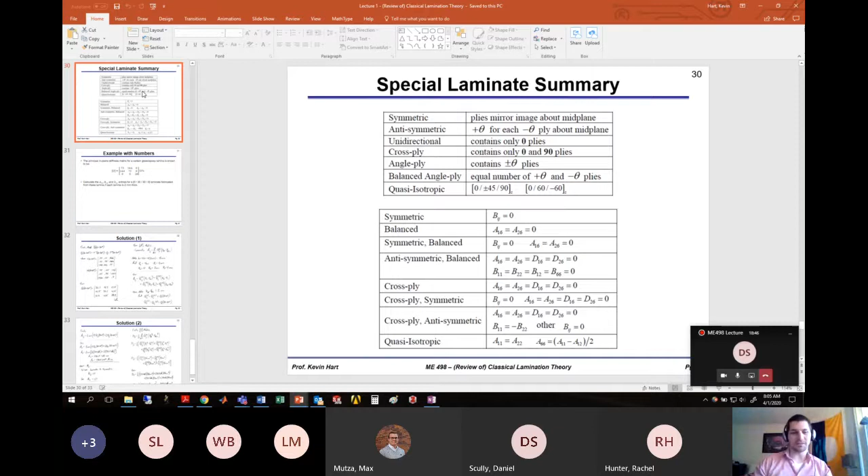So these are the laminate stiffness matrices. We talked about and showed one example with a symmetric laminate and how we might see that calculation proceed. If there are some symmetric characters or special characters of the laminate, the calculation of these A, B, and D matrices proceeds a little bit easier.

Now, the last thing I want to do is quickly go through this example. We already went through an example without numbers, but I want to go through one with numbers here just so we can bring it home. This is going to be similar to homework problem number 1 on homework number 2.

So let's say you're given the principal in-plane stiffness matrix, this matrix Q, for a certain glass epoxy lamina, and you calculate it to be something like this. Remember you could calculate this from fiber volume fraction and material properties of a lamina you created. You can calculate E1, E2, nu 1,2, and so on, and those feed into the S matrix, which you can then invert to get this Q matrix. That's something you did on homework 1, so hopefully you're comfortable with it now.

Given these values in our in-plane stiffness matrix Q, we want to calculate A11, B11, and D11 entries for a laminate stack that's 0, 30, 30, 0, assuming each lamina in the stack is 2 millimeters thick.

I'll come over to the writing pad for just a second, and then we'll throw it back over to the PowerPoint slides to run through it quickly. Here's the example, and I'll switch over here in just a second.

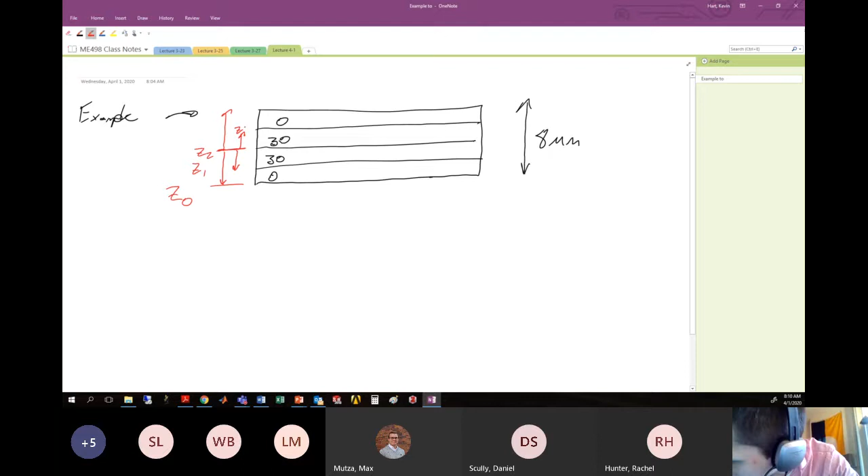And these are our general definitions for these Z values. Remember, I'll pop over here to PowerPoint for just a second. Remember, we define our midplane as sort of the location of z equals 0. And so we would say here to the bottom, this is z0. And here this is what would be z1. Here's z2. Here is z3 and z4. So just defining from the center of the laminate stack to either the top and bottom of the various lamina.

I know it feels like I'm beating this ABD thing to death, but it really is the foundation for pretty much what we're doing the rest of the theoretical portion of this class.

All right, so here we define our Z values, and now we're just ready to plug in. So the AIJ, since we have 4 components, becomes Q-bar IJ of the first layer multiplied by thickness of the first layer plus Q-bar IJ second layer times thickness of the second layer, so on and so forth. And we'll note here that the thickness of each layer, Zk minus Zk minus 1, is just 2 millimeters. So that's pretty obvious to see.

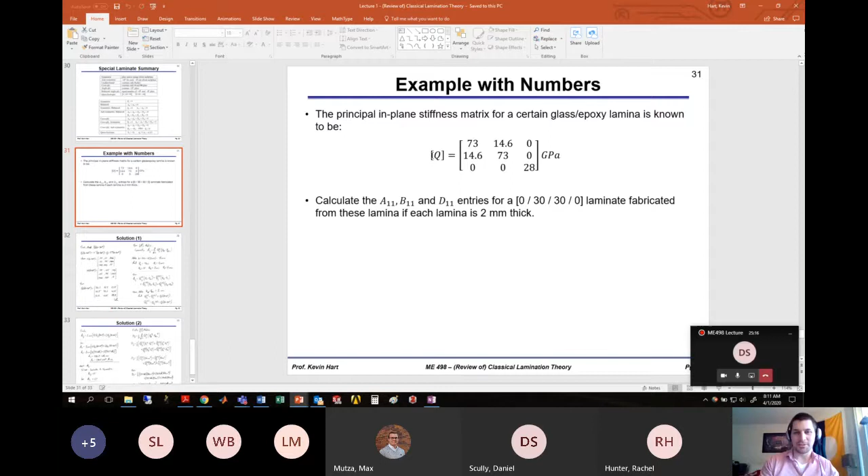And our QIJ for layer 1 and layer 4, so this is the stiffness matrix of layer 1, stiffness matrix of layer 4, is the stiffness matrix of the 0 degree orientation, which was given to us in the problem as just this particular guy here. So we know that's given to us in the principal material directions, and that is for theta equals 0. Now, layers 2 and 3, we're going to use the stiffness matrix for when theta is 30 degrees, which is this guy here that we calculated over here.

So proceeding on, you're going to end up with something that looks like this, pulling the 2 millimeters out for each one of the individual layers. And then we have 2 contributions from the stiffness layer of the 0 direction, 2 contributions from the stiffness in the 30 degree orientation. And we move through with our calculations, plugging in the numbers here.

So if we're looking at the 1-1 entry, we're going to take the 1-1 entry of Q for theta equals 0 degrees, and we see up here that that is 73 GPa. And then here, the 1-1 entry for the theta equals 30 degrees matrix, we see from our previous calculation that that is 72.1. And that gets us a value for the A11 matrix, 580.4 GPa millimeters, or if you convert to Pascal meters, which is common, it's 580.4 times 10 to the 6th for the A11 entry.

Okay, so this is kind of going through a full-blown application or calculation with numbers. Bij, all Bij are 0, this laminate is symmetric, so that's easy. So B11 here is 0, and that's because we know the special character of this particular laminate.

All right, lastly, our D matrix, here's the full calculation. Again, the same idea holds. Don't forget your 1/3, contributions of the stiffness from each of the individual layers, multiplied by these locations of the laminates, all to the 3rd power. So again, we go through, we know all these individual values, including what would be the QIJ entries now for the 0 degree orientation, 30 degree orientation lamina. Plug all the numbers in appropriately with cubed values appropriately, and you'll end up with a D11 of 3110 Pascal meters cubed here. I want to give this example with numbers because it's similar to what you got going on for the first homework problem in homework number 2.

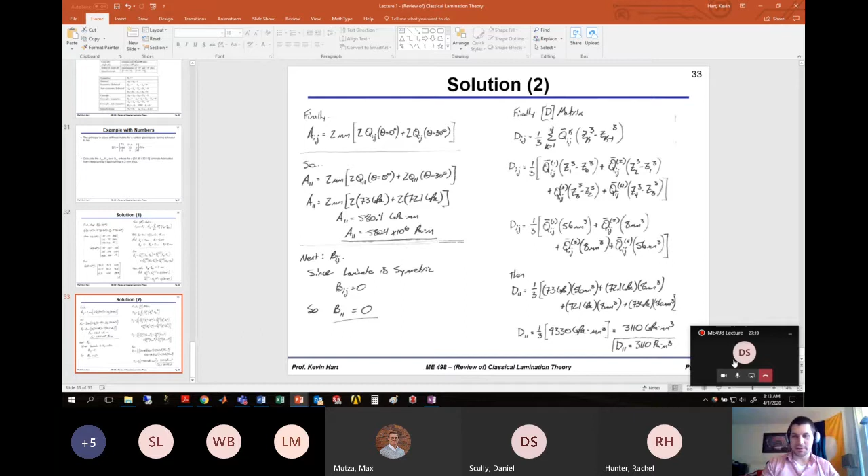All right, there we go. How we doing? We awake? Got the coffee going? I got my Perrier. I'm fancy.

Why drink boring regular water when you could drink sparkly water.

Okay, so with that said, I'm going to move onto the next set of notes. That is, we're going to introduce the idea of laminate engineering properties. The next set of notes is laminate engineering properties.

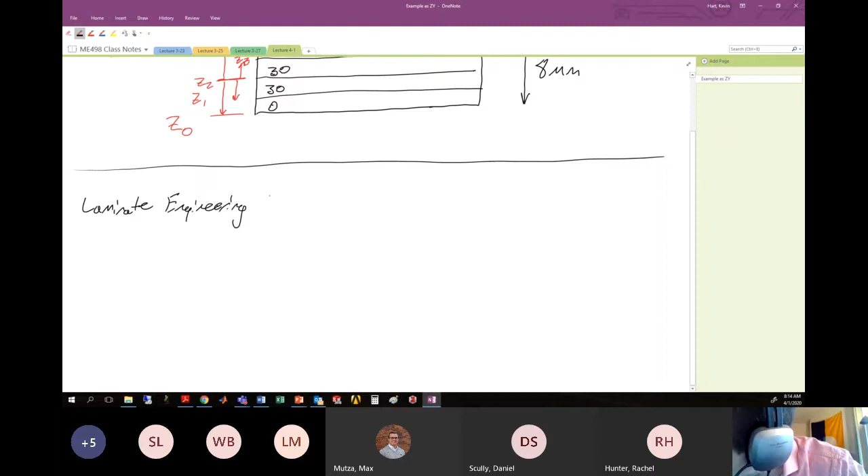Now, we've calculated or gone through all these steps to calculate things like the A matrix, the B matrix, and the D matrix. Those matrices define the constants that make up the relationship between applied loads and the strains and curvatures that develop. But it's not really intuitive to discuss material properties in terms of A, B, and D matrices. If someone fabricates a laminate, you're not going to walk up to them and say, 'Hey man, what's the A11 value for that guy?' It doesn't really make a whole lot of sense.

So instead of talking about properties of the laminate as A11, B26, whatever, you probably want to talk about what is the stiffness or the elastic modulus of this material if I load it in a certain direction. So given a laminate, we would like to describe the way that the laminate behaves using typical engineering properties. We'd like to describe its behavior with typical engineering properties.

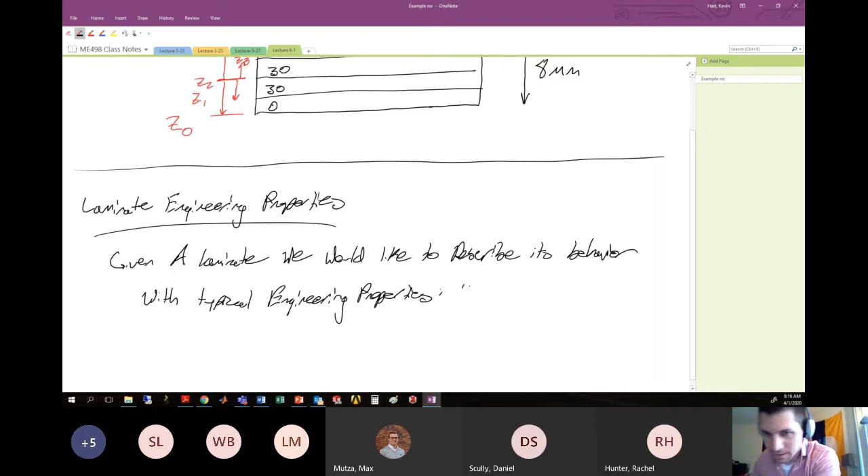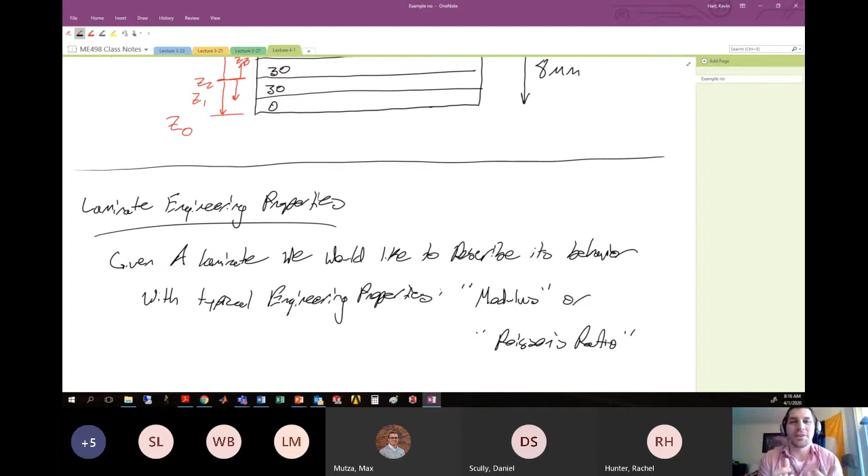So think about things like the modulus or Poisson's ratio. Modulus should come to mind, or Poisson's ratio should come to mind. These typical physical, physically interpretive concepts - modulus, Poisson's ratio.

So let's take a step back in our Wayback Machine, back to what you talked about in ME3005. What would happen if we wanted to describe these things for an isotropic material?

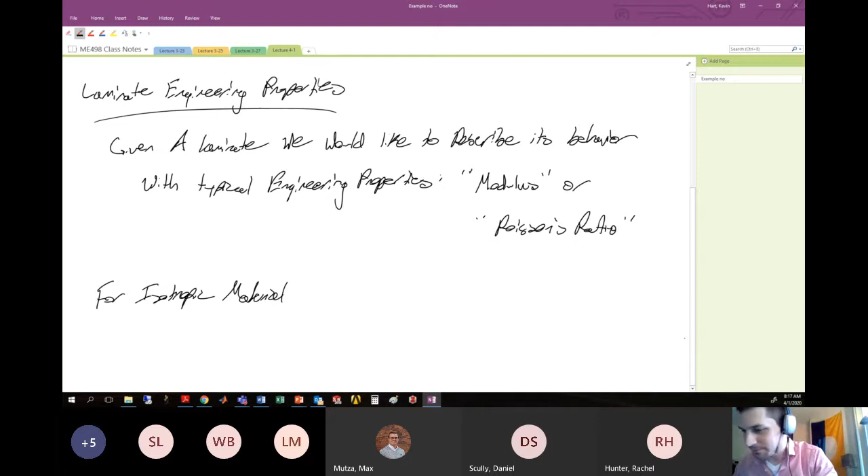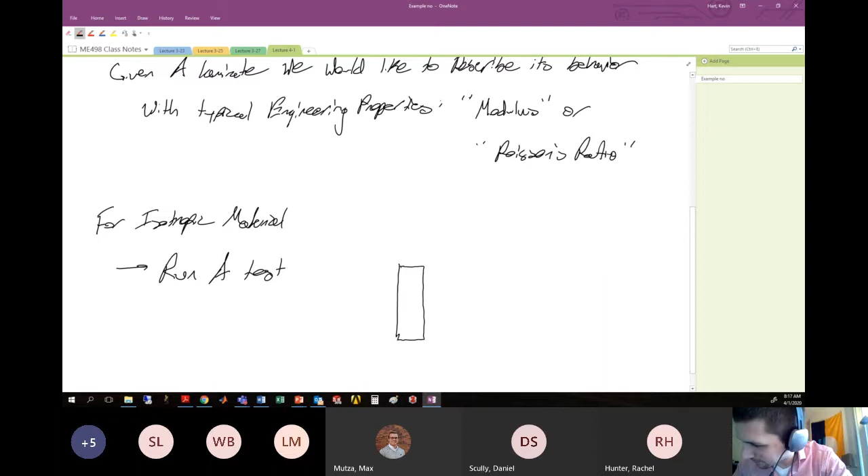For isotropic material, that's pretty straightforward. You would run a test, and that test might look something like this, where you have some coupon - let's make it rectangular for now. To this, you're going to load it here with some load P, load it here with some load P. What's going to happen? Well, that thing's going to elongate and you're going to create stress.

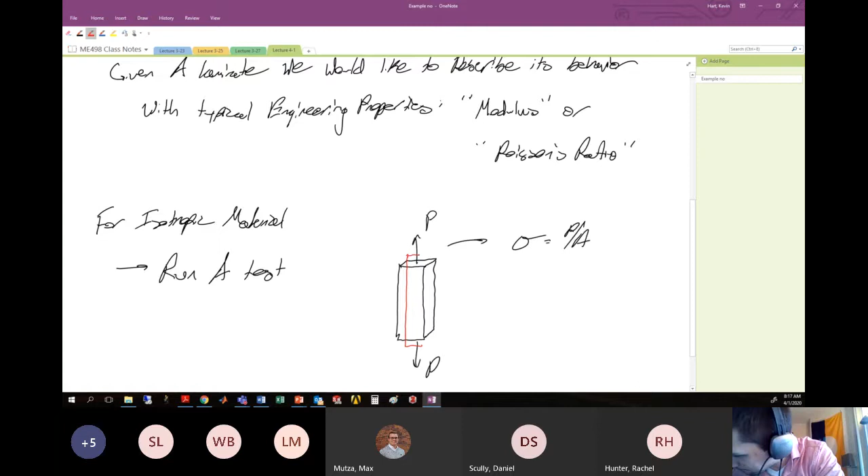This will give you a stress, which is the load over the area. And if this thing elongates during the test, which it might, this is delta plus L, the displacement plus the original length. Then you're going to get a strain that is something like delta over L. Then your elastic modulus E is simply the stress divided by the strain. This gives you an engineering constant, the elastic modulus, described by some physical things that you did - you applied some stress, there was some strain that resulted, you measured those things, and away you went. So for isotropic materials, that's pretty straightforward, that's pretty easy.

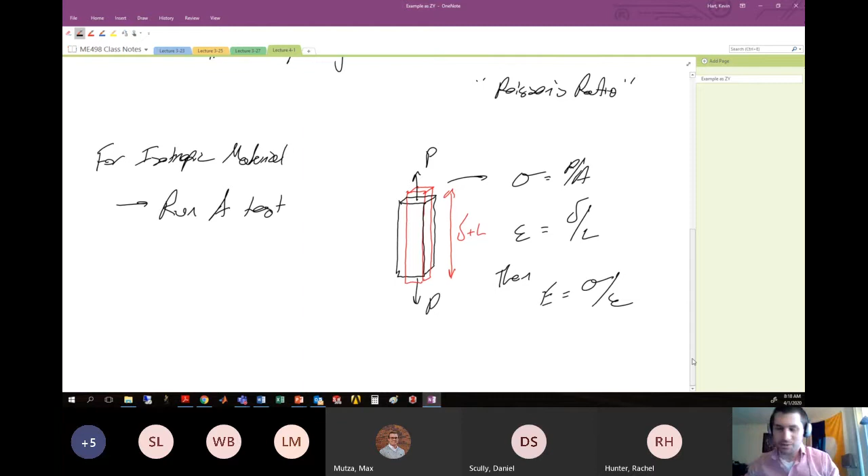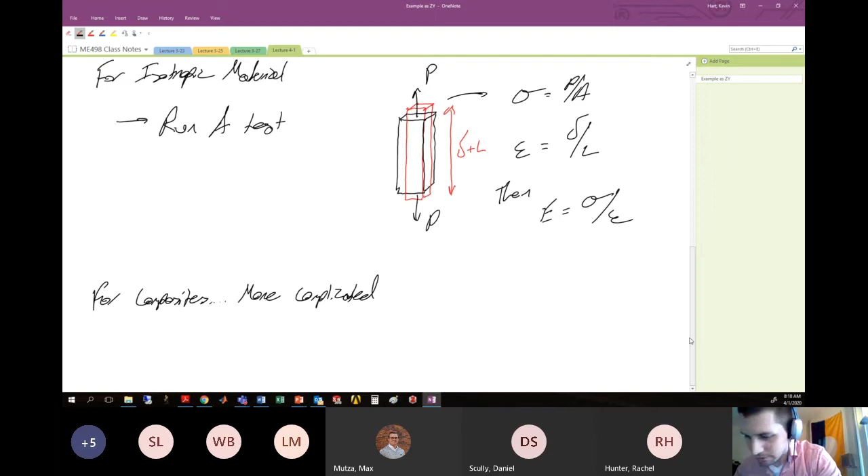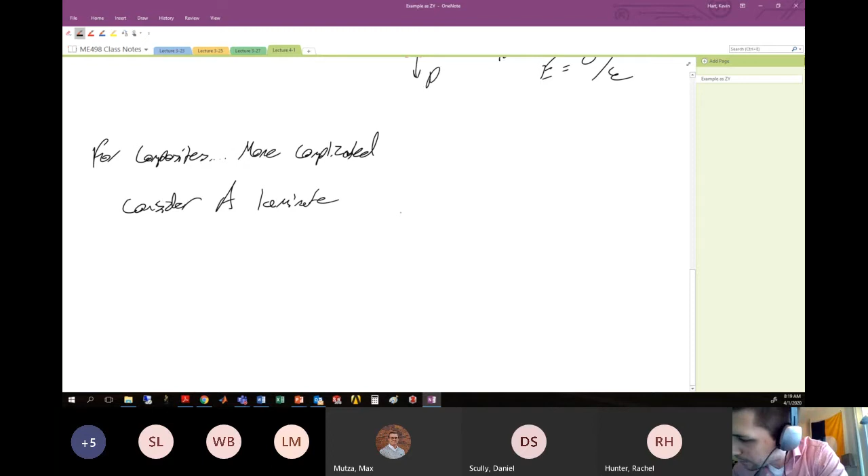But for composites, it's more complicated. If you had a laminate material, let's consider a laminate where maybe you have a rectangular coupon that looks like this, but it's a laminated material, so you have multiple layers of that particular material in this laminated fashion. Now if we pull on this guy in this direction with a force per unit length, which might be something like Nx - this is force per unit length.

Then the response is complicated. The stress in X is not just Nx over the cross-sectional area. We know it's more complicated than that because the stress distribution is different in each layer. It's not necessarily that value, since stress varies in each layer.

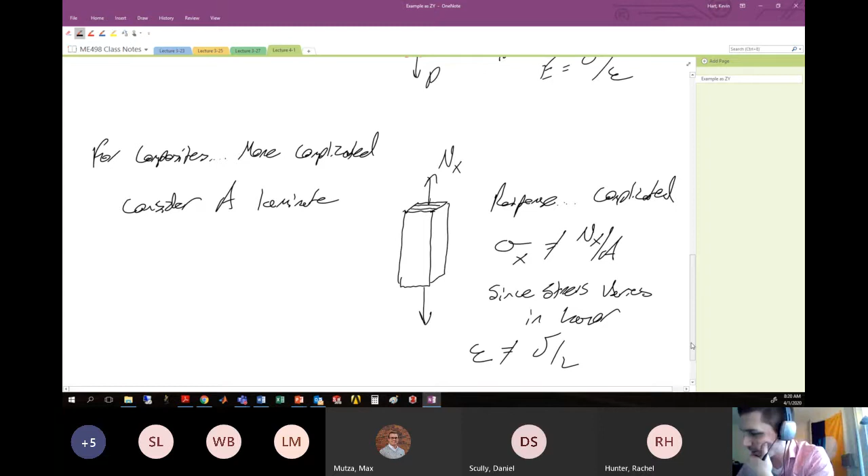And the strain is not just whatever your displacement is over the original length. We know that when we pull on these laminates, there can be shear strain that develops, there can be curvatures that develop, there can be all sorts of things that develop. So you can develop shear strains and curvatures from axial loading. So it's much more complicated.

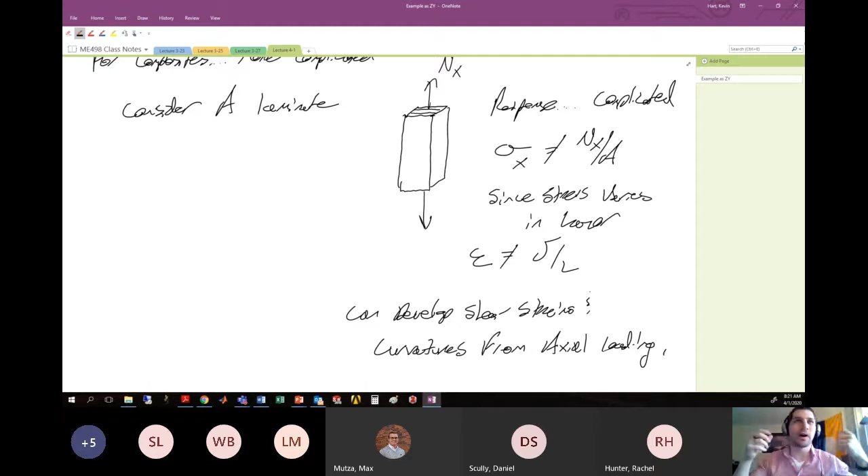So we have to talk about what strategy we might employ to discuss something like, what is the stiffness of this guy in this particular direction, given a certain assumption about loading and cross-sectional area and all this sort of stuff. So we need a different strategy.

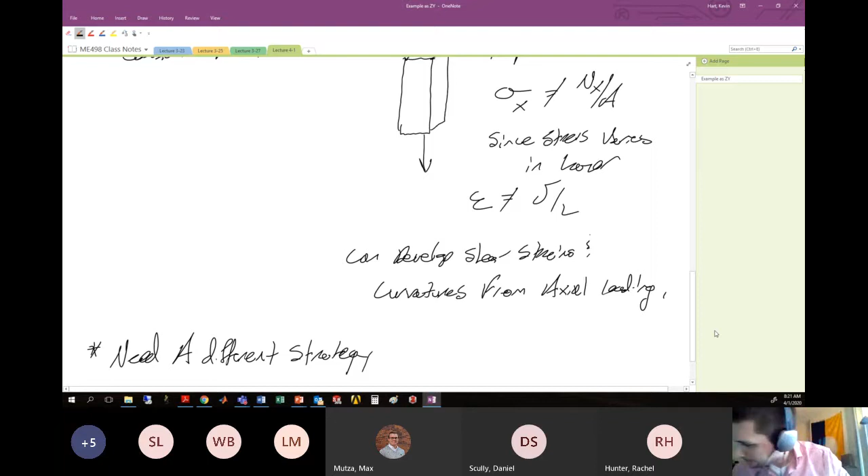All right, so let's talk about what that strategy might look like for us. Let's work our way through the math to get to our ultimate final location. So how might we do this?

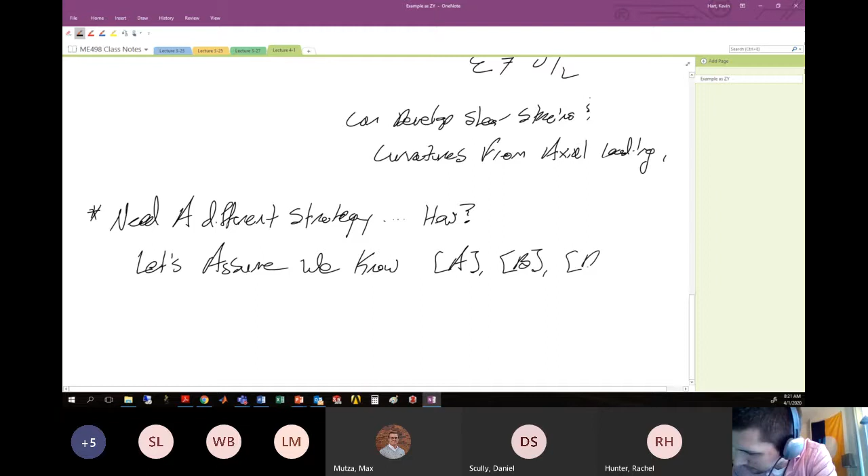Okay, well let's assume we know our ABD matrices. So we know the laminate stacking sequence, and we know the stiffnesses of each of the individual lamina, so we could construct the A, B, and D matrices. Let's assume we know that.

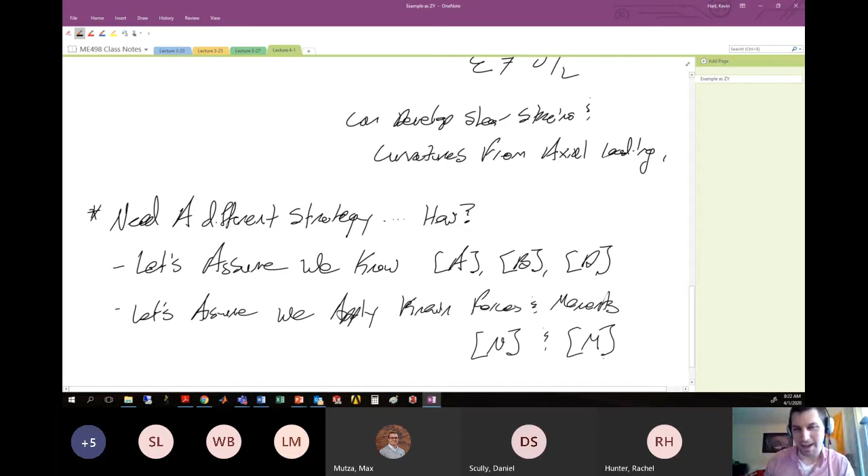And let's assume we apply some known forces and moments, which in this class we call N and M, where these are vectors of nx, ny, and ns, and m is mx, my, and ms. Remember we've talked about these.

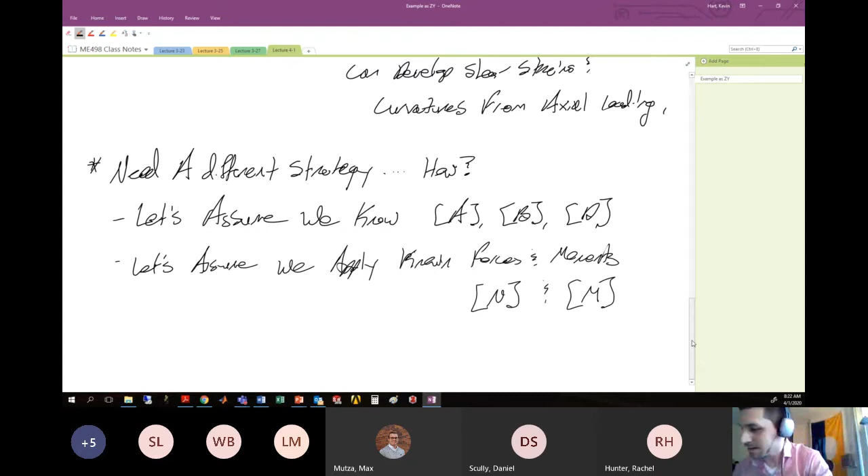Then we can discuss things like the relationship between loads and strains. So the following strategy might occur. Here's our strategy. Step number one would be to determine what the strains and curvatures of the laminate that result would be.

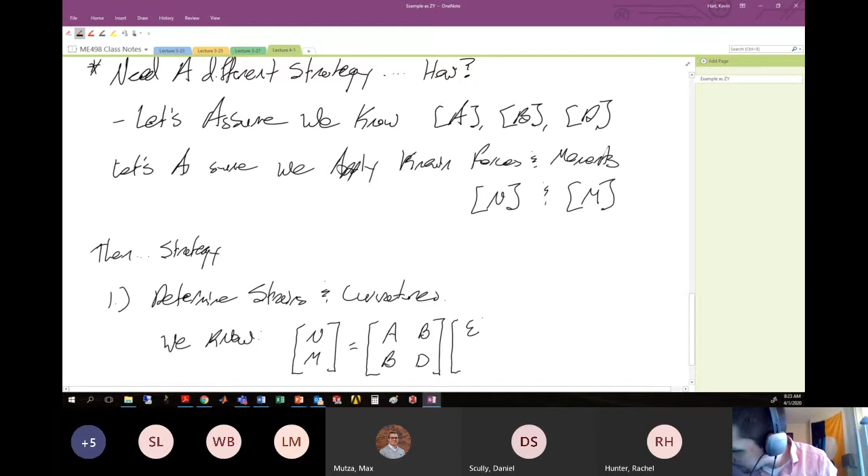From previous lecture, we know that the relationship between the forces and moments we apply, N and M, are related to the strains and curvatures that develop through the stiffness matrix A, B, B, D, multiplied by the midplane strains epsilon 0 and the curvatures kappa. All right, so we know this.

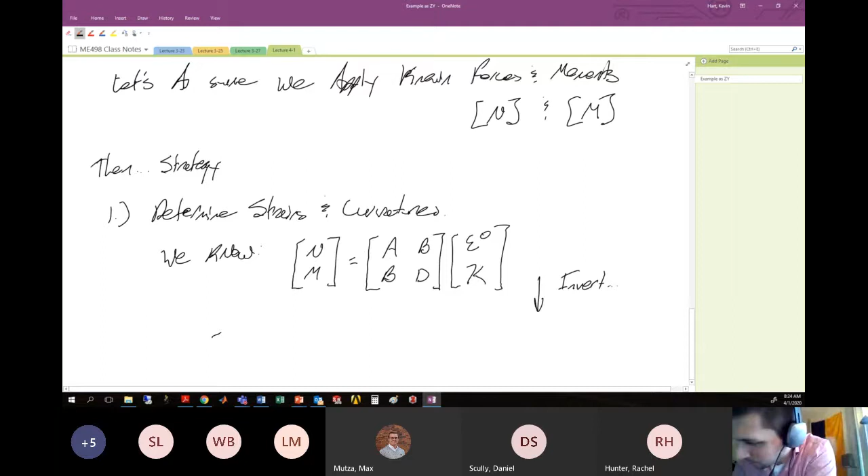If we actually want to determine what strains and curvatures might develop given applied loads, then we simply invert this to determine what the strains would be. So we could invert this to get epsilon 0 and kappa equal to this ABBD matrix inverted, multiplied by the loads and moments we may apply. That's step number one, determining the strains and curvatures that might develop.

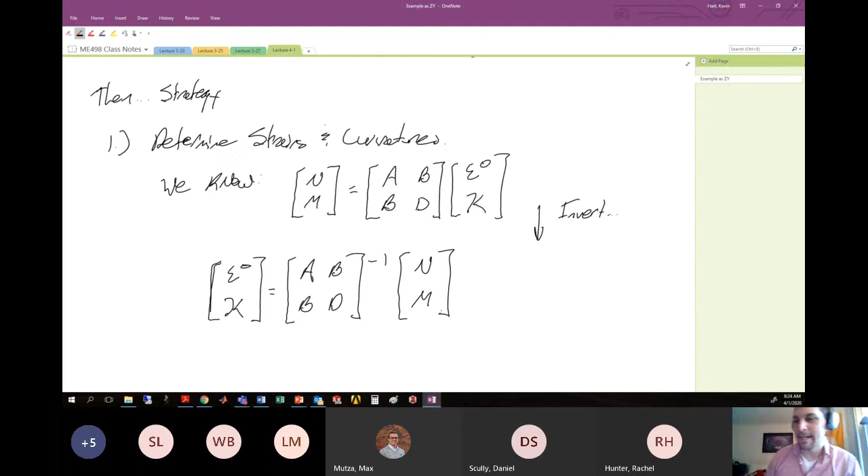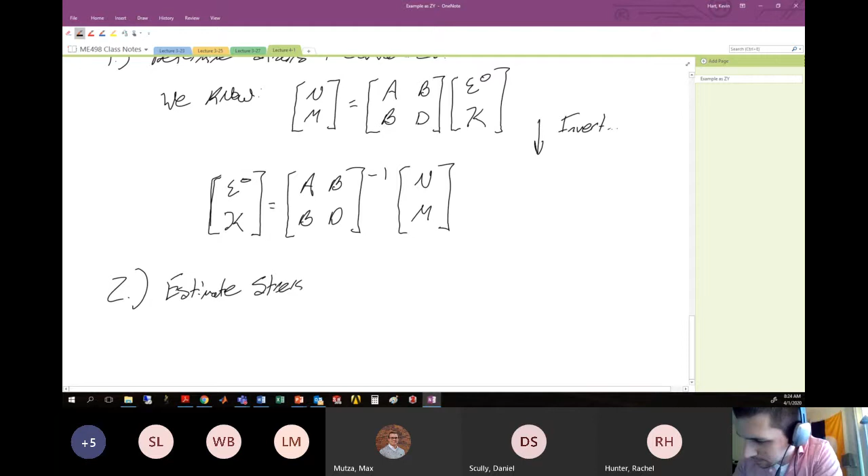All right, so step number two is to come up with some expression for the stress, to estimate stress applied by averaging N and M in some way. If we could come up with some average stress that we might be applying, then we might be able to relate the strain we determine using this inverted ABBD matrix to the average stress we apply, to determine things like the modulus, which is a relationship between stress and strain.

So we will employ the mean value theorem. It's so mean. To give sort of estimated stresses.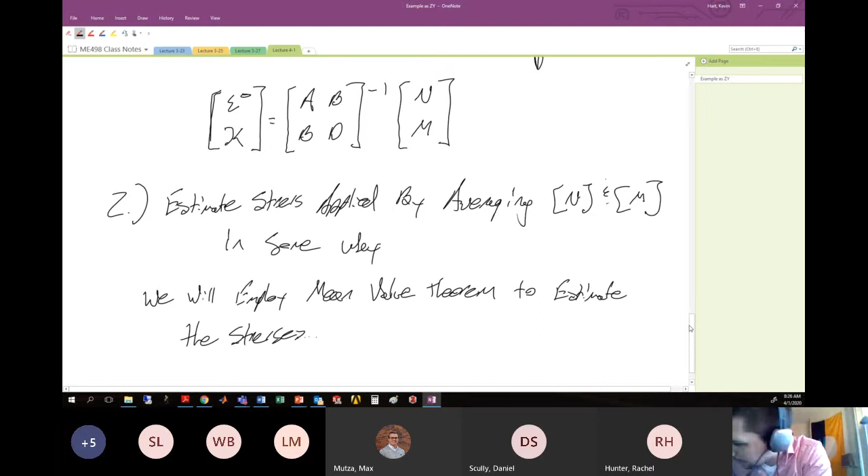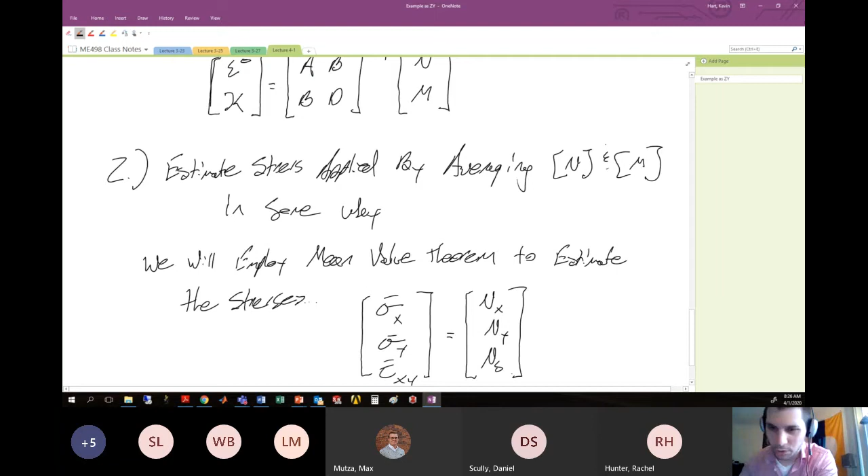We will show that we can do that by writing something like the mean stress in X, which we'll call sigma X bar, the mean stress in Y, and the mean shear stress, which we'll call tau XY bar, or sigma S bar, is equal to the applied loads Nx, Ny, and Ns, all normalized by the thickness of the laminate, 1 over H. So these would be average stresses, and these are applied loads normalized by thickness, where H is the full thickness of the laminate.

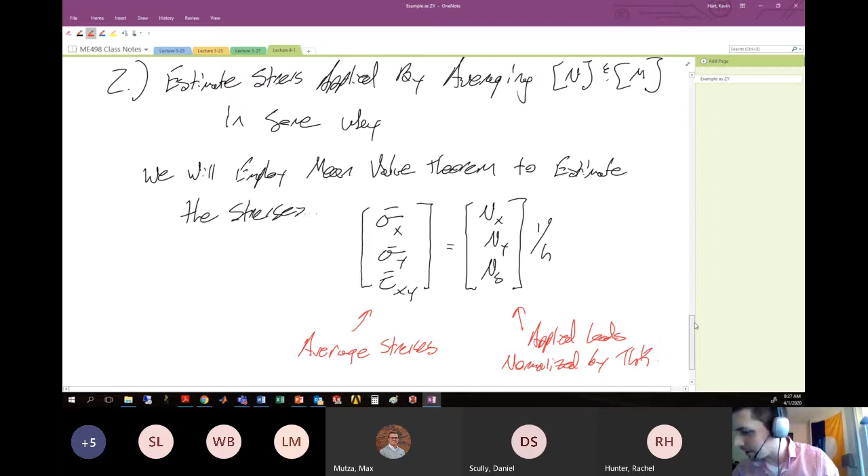And we will show how this comes to be. So if we then have some average stress that we're applying, and we can estimate the strains and curvatures, then lastly, we'll say that we can approximate

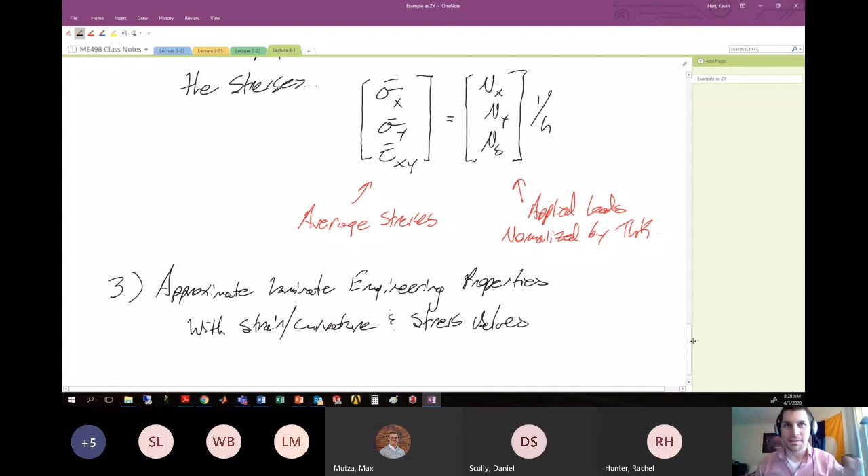the laminate engineering properties with these strain, curvature, and stress values, to come up with what we might say is an approximate laminate stiffness or an approximate laminate Poisson's ratio.

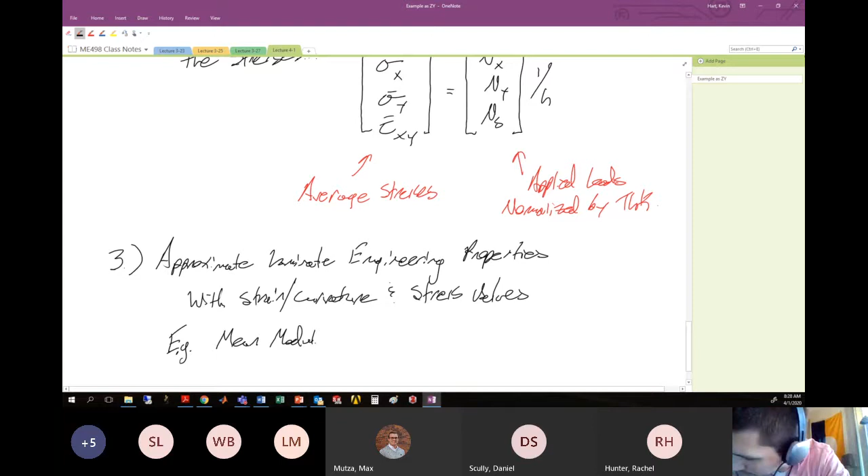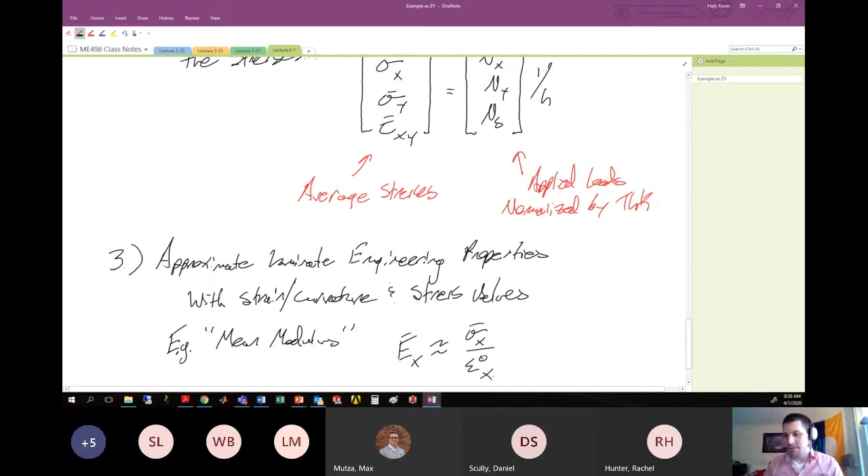So, e.g., a mean modulus, which might be something like E bar X, approximately equal to this mean stress calculated from the mean value theorem divided by the strains which might develop in the X direction. Okay, so that's the general strategy.

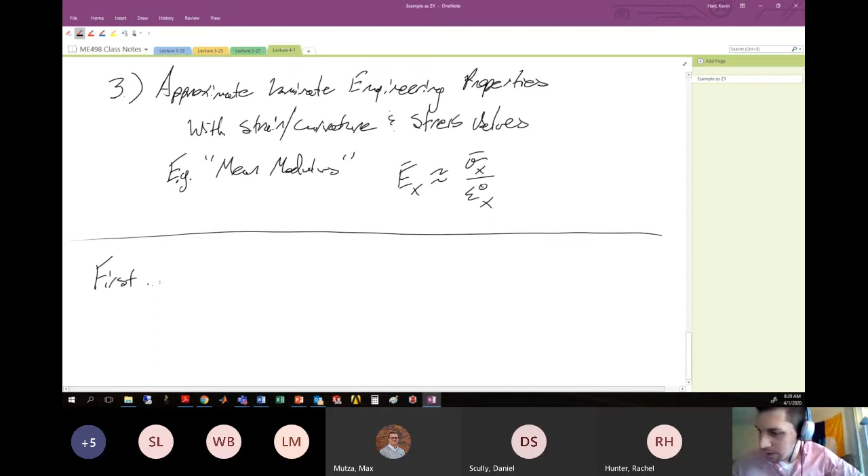So let's go ahead and work our way through this. Step number one would be coming up with these strains and curvatures from applied loads and the stiffness matrix. First, we're going to talk about the laminate compliance matrix. This laminate compliance matrix is just the inversion of the laminate stiffness matrix.

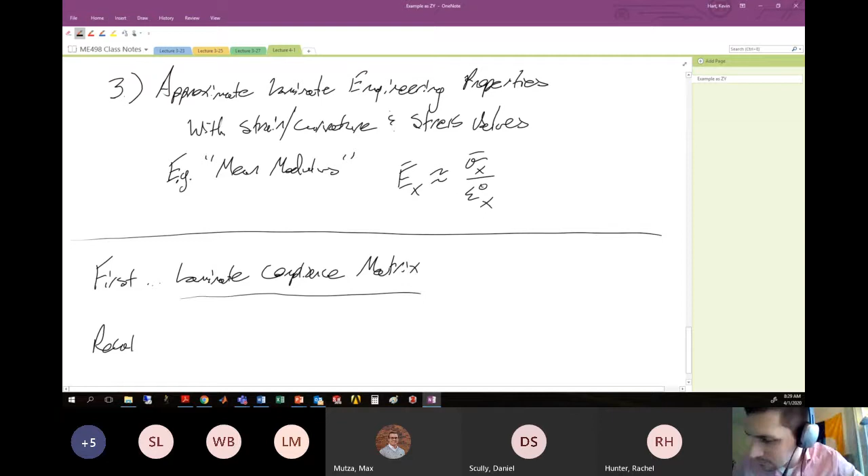So remember, we had the relationship between the applied loads, here would be N and M, these applied loads and moments, which is A, B, B, D, these stiffness matrices, multiplied by the strains that develop, epsilon 0 and kappa.

I always have a problem with that, like kappa. I never really know how to draw that. I like want to just put a normal K, but I have to distinguish somehow, so I put this curly Q on it. I don't really know what I'm doing.

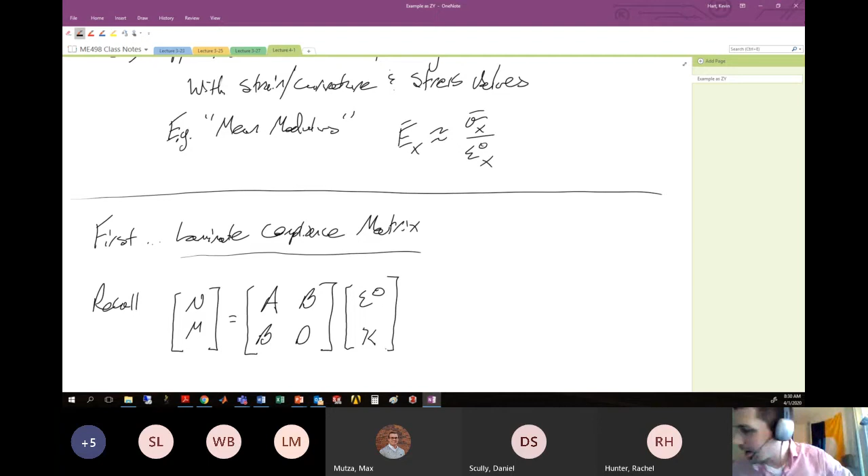Okay, I try my best. All right, so this is our general relation. And we said that this full matrix here is our laminate stiffness matrix.

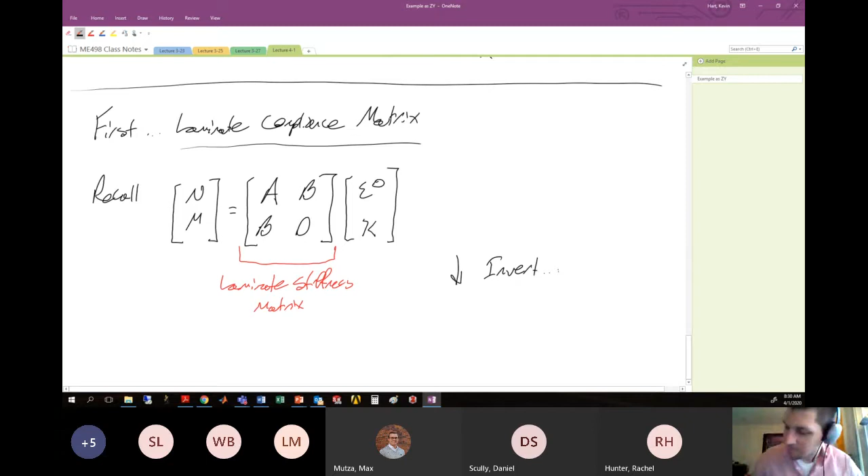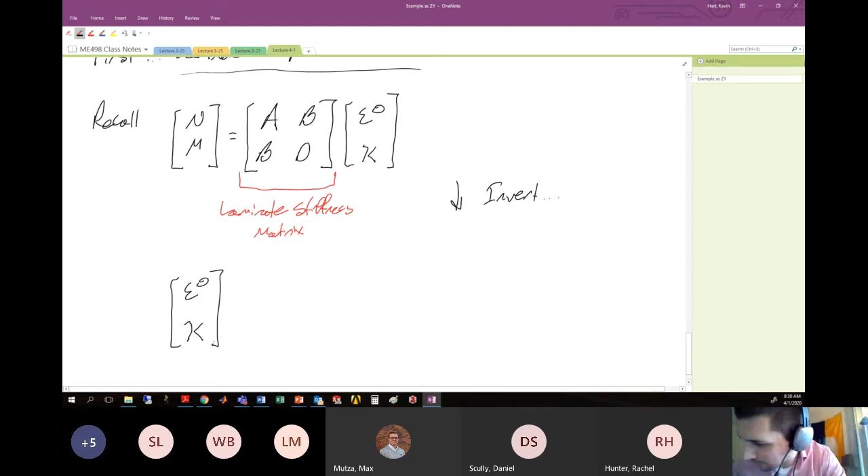All right, so we can invert so that we solve for the strains, and that would leave us with the strains and curvatures. Here's my ABBD matrix again, my favorite fraternity. It will be the inverse of A, B, B, D multiplied by the loads and moments we apply. So this is pretty straightforward, calculating the strains and curvatures from the applied loads. This here we would call the laminate compliance matrix.

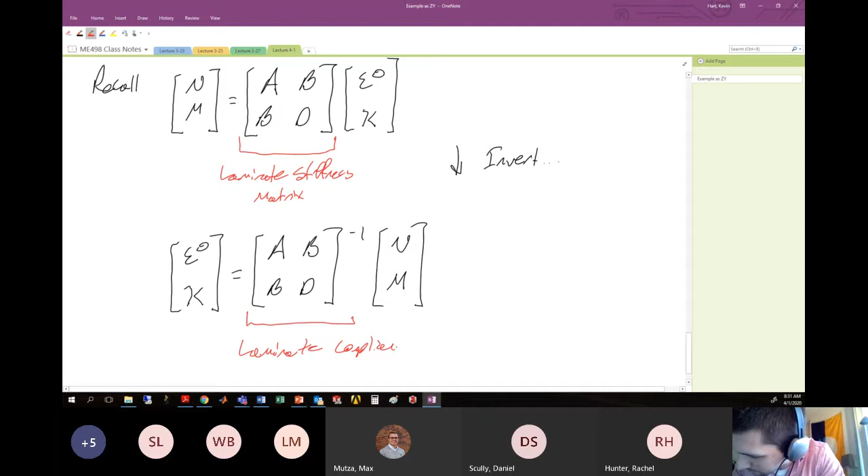And usually it is written with lowercase a through d. So we use uppercase A through D to talk about the stiffness. We'll write here that this laminate compliance matrix is often written as lowercase a, lowercase b, lowercase c, and lowercase d. We'll make a note here that generally the B matrix—remember, all of these are 3x3s—so let's be clear about that.

And we'll note here that it is not necessarily the case that little b and little c are equal to each other. It was a little bit strange that when we talk about the stiffness matrix, generally the B matrix, which occurs in the upper right and lower left quadrants of the 6x6, end up being equal. But when we invert, because of the inversion properties of matrices, the upper right and lower left quadrants are no longer necessarily equal to each other. So we have to be very careful about what's occurring in this situation.

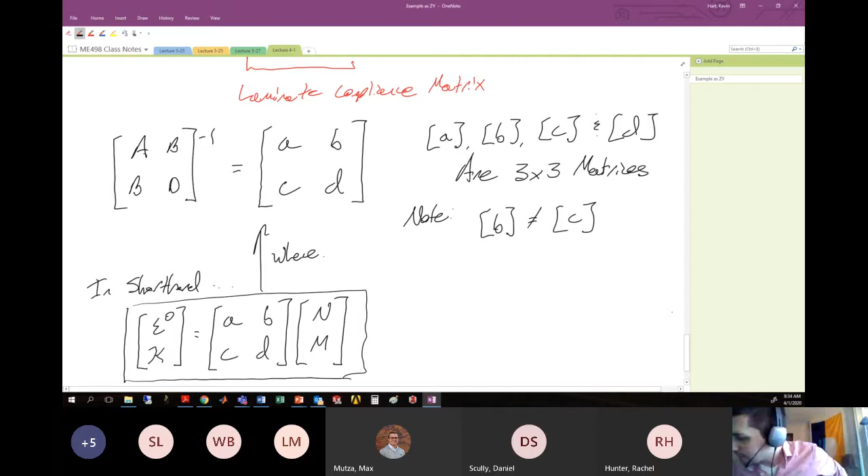If we have a symmetric laminate, things sort of shake out and become a little bit more clean. That's because when we have a symmetric laminate, the B matrices of the stiffness matrix kind of go away, the capital B matrices. How are we doing? Any questions right now? Nope. I'm just continuing to talk to myself.

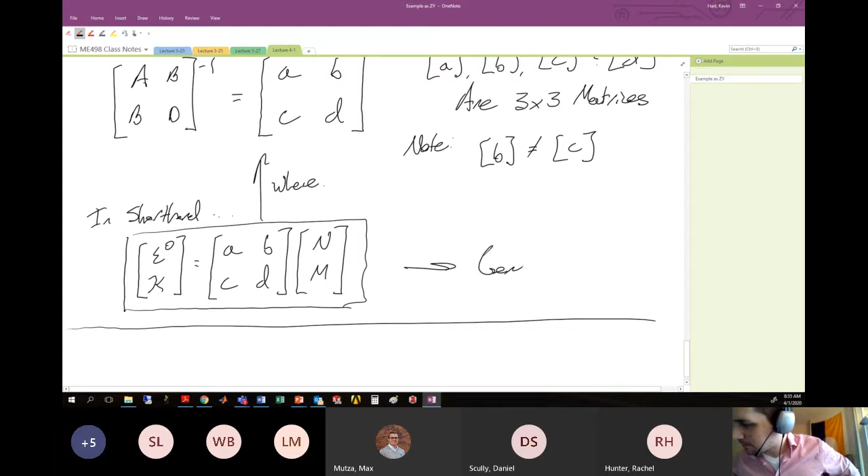So this is generally the relationship between strains that might develop if we apply loads to our piece. This is the general case. Oftentimes, though, we make simplifications for known special laminates, right? So for a symmetric laminate, we just talked about this, that the B matrix is equal to 0.

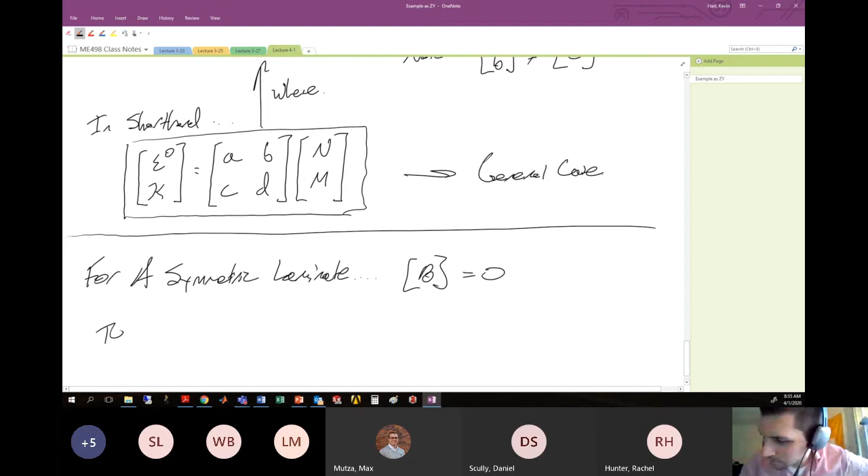So the total stiffness matrix ends up looking like: the loads and moments that we apply equal to the A matrix times 0, times 0, times the D matrix, multiplied by epsilon 0 and kappa. So with these zeros in place, we can see that there is decoupling of the curvatures from the applied loads N, and the strains from the applied moments M.

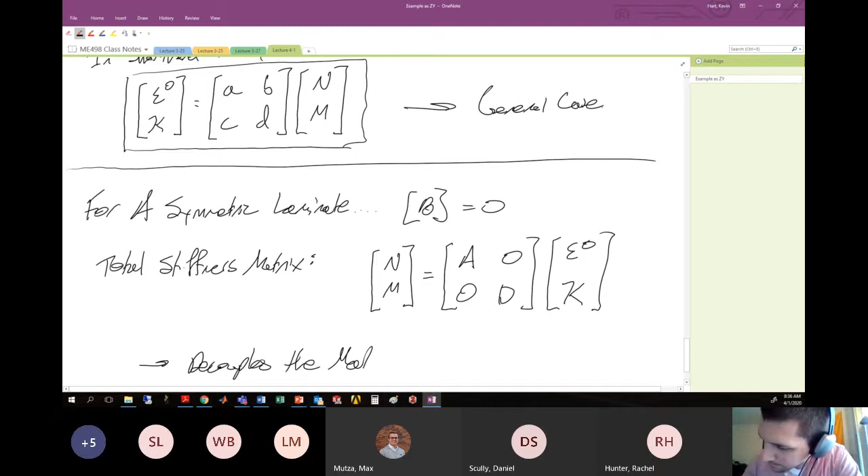So this decouples the matrix. Where generally, if we look at these equations, we'll have that N is equal to A times epsilon 0, and M is equal to D times kappa, right? So there's no relationship between strains and moments, and there's no relationship between curvatures and applied loads N. So then we can then calculate inversions easily.

And because we can decouple the applied loads N from whatever curvatures we might have, and the strains from the moments, we would end up with something like, again, N equals A times epsilon 0. Easily, we can see that the inversion here is something like little a times N

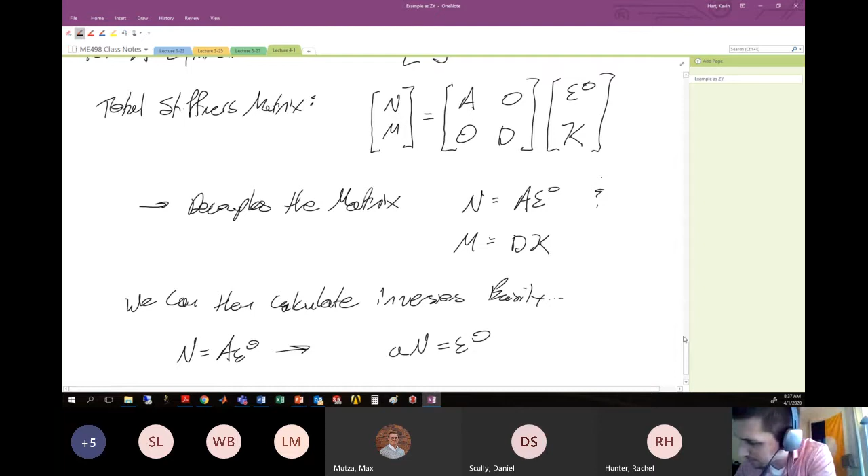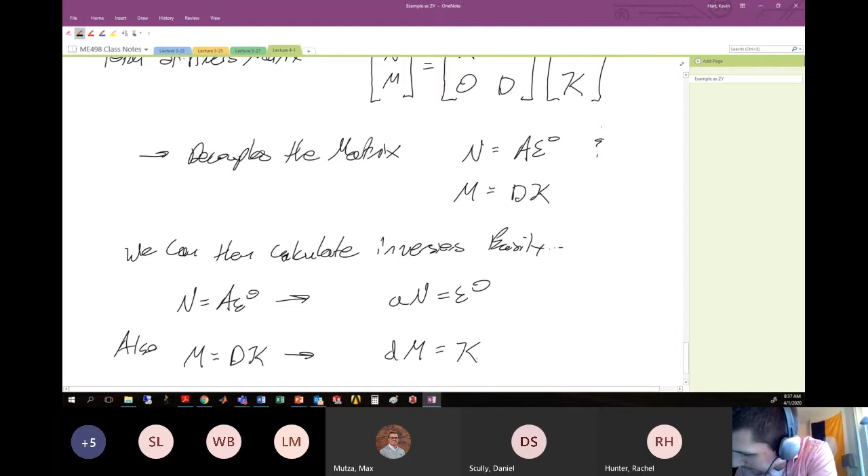is equal to epsilon 0. Also, since the moments applied are the D matrix times the curvatures, the inversion here is little d times M equal to kappa. All right, so this is specifically for compliance relationships to get strains. No longer do we have some big 6x6 that we worry about. Here, these are just 3x3s.

These guys here are 3x1, and these guys here are also 3x1. So instead of having the big 6x6 mumbo jumbo nonsense, if we have a symmetric laminate, we can sort of decouple these things, break them apart, and make our lives a little bit simpler by working in a 3x3 space rather than a 6x6 space.

My pen's been good today. It hasn't crapped out on me once. I haven't run out of ink in my pen once today.

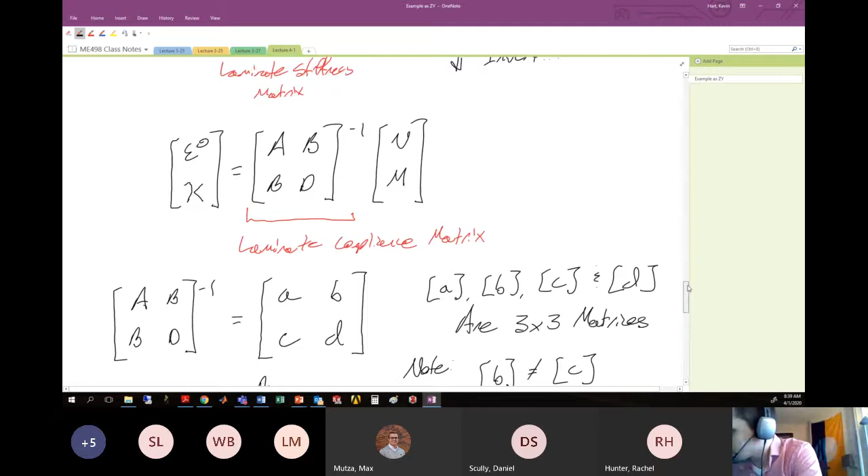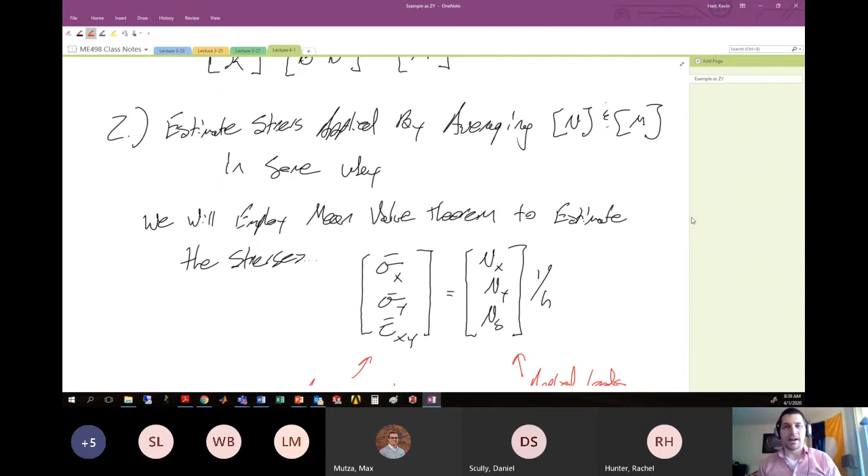So way back at the beginning, we talked about our general strategy for ultimately coming up with laminate engineering properties. Strategy number 1 was to define strains and curvatures from applied loads. We did that by discussing the inversion matrix to get ourselves a compliance matrix, which will give us strains from applied loads and moments. Step 2 in our strategy is to estimate the stress applied by averaging the loads and moments that are applied, to give us an average stress over the laminate. That's what we're going to discuss now.

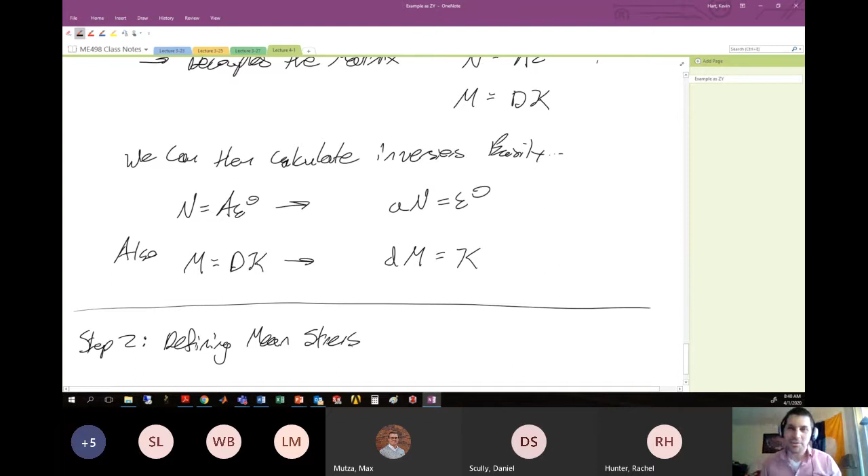So this is step 2 in our process, and this is defining a mean stress. Mean as in average, not like it's a mean value.

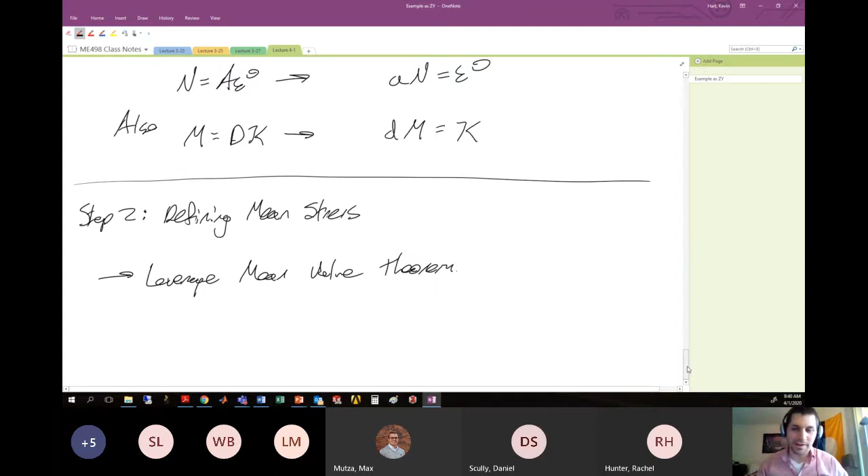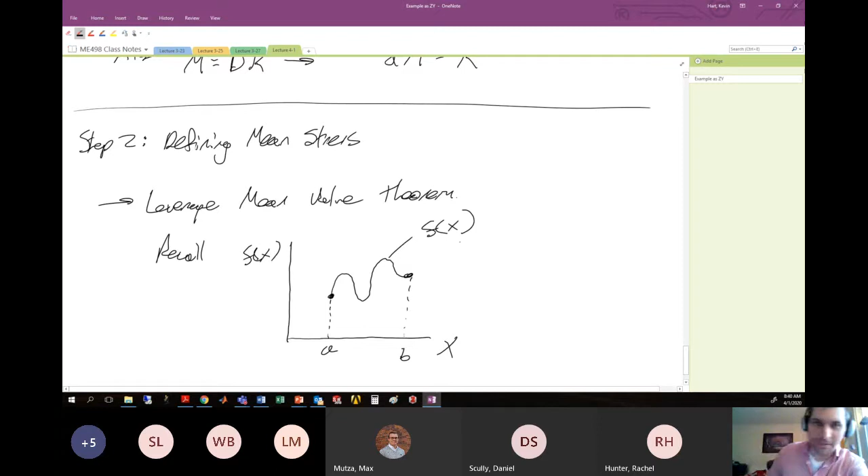For this, we're going to leverage the mean value theorem. I'm sure you guys all have the mean value theorem memorized, right? If not, recall that on some function space, let's call this x and this f of x. Just as a reminder, if you have some function that exists between a and b, and this function is all crazy and nonsensical, here's your function, f of x, that there exists an average of that function between those 2 points.

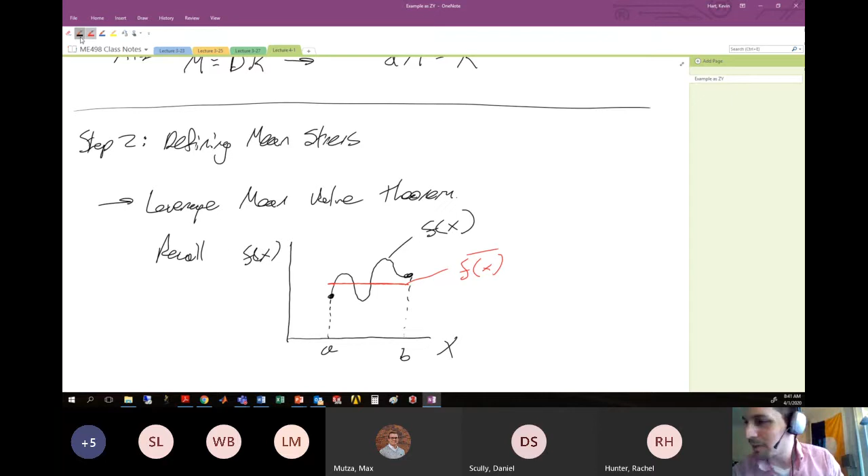Let's try to point it out here, the average of that particular guy is here. This is what you might see as f(x) bar. This is the mean or the average of this function over the domain. And if we want to define mathematically what that is, the mean value theorem says that the average of this, f(x) bar, is normalized by the domain b minus a: 1 over b minus a times the integral from a to b of our general function f(x) dx. So this is the mean value theorem. It gives us an approximation for all points on that function over the domain from a to b.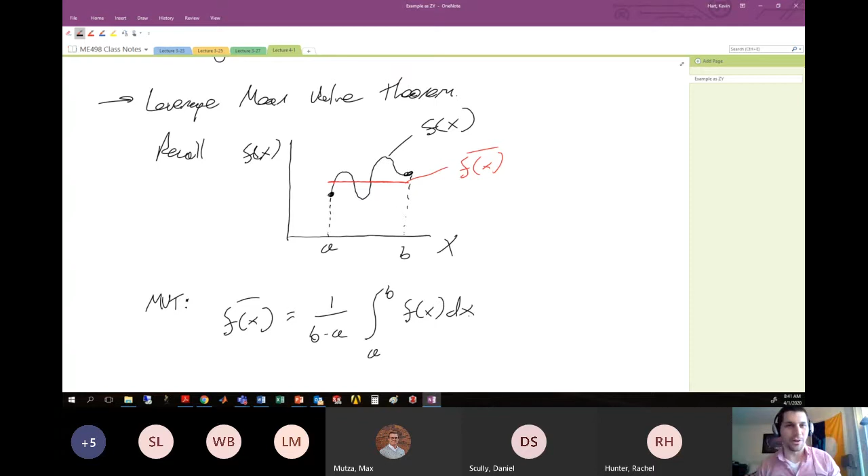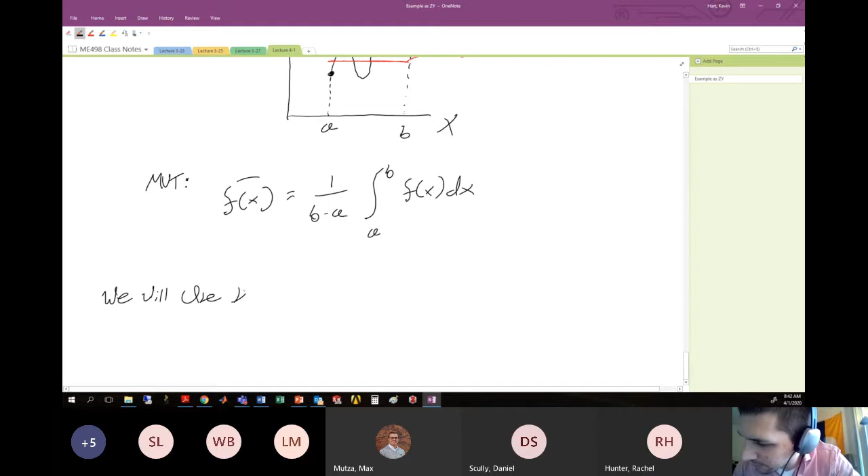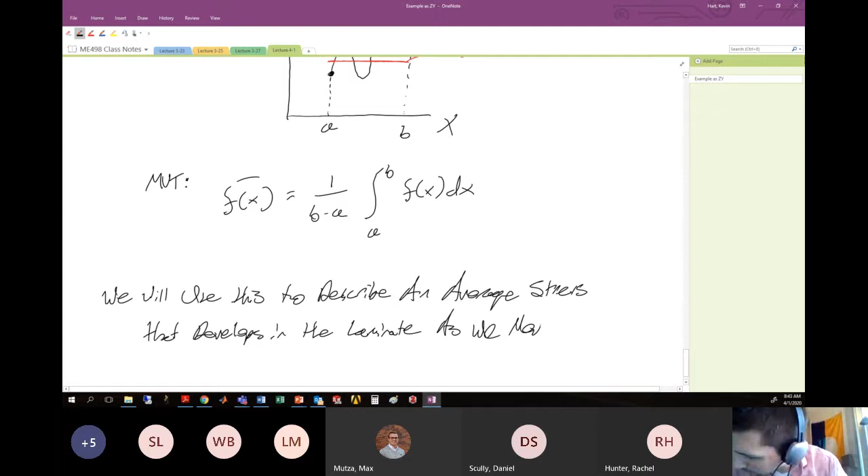Now why is this useful for us? Well, this is useful because with our composite, we have a very strange function of the stress that exists between the bottom of our laminate and the top of our laminate. That's because we know the stress distribution changes as we move through the individual layers of the laminate. So we need some sort of average stress that encompasses the contributions of each one of the individual layers as we move through the layers, to go from the bottom to the top of the laminate. So we will use this to describe an average stress that develops in the laminate as we move through the thickness.

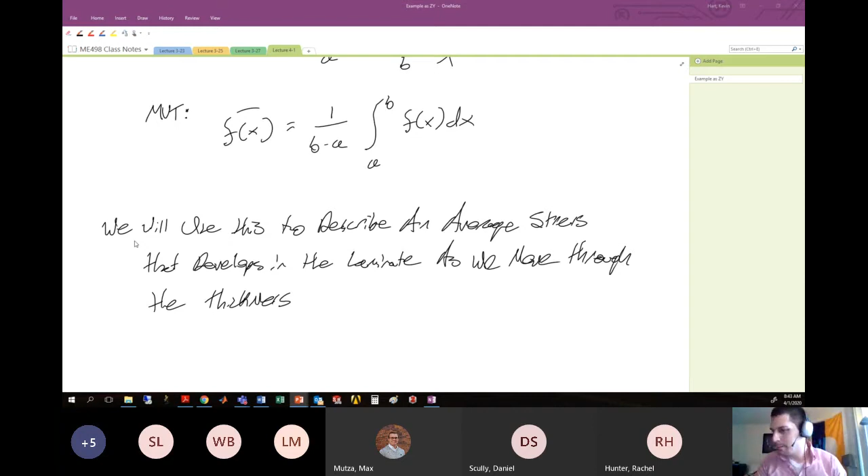Instead of trying to sketch it myself, I'm going to bring in a picture to help describe what I generally mean. We've seen this picture a couple of times now, and I just want to bring it back and talk through it. We'll also write here the general mean stress that we're going to calculate. Remember, if we have a laminate with layers 1, 2, 3, and 4, we have a strain applied that is continuous through the thickness. There's no strain discontinuities, otherwise we'd have holes in our piece. We know the relative moduli of each layer could be different, which results in a stress variation through the laminate. Different layers have different stresses in them, with discrete jumps between the individual layers. So when I'm talking about using the mean value theorem, I'm talking about calculating this average stress, sigma x, which encompasses the approximate average of all these individual pieces added together to give a mean value for that particular stress.

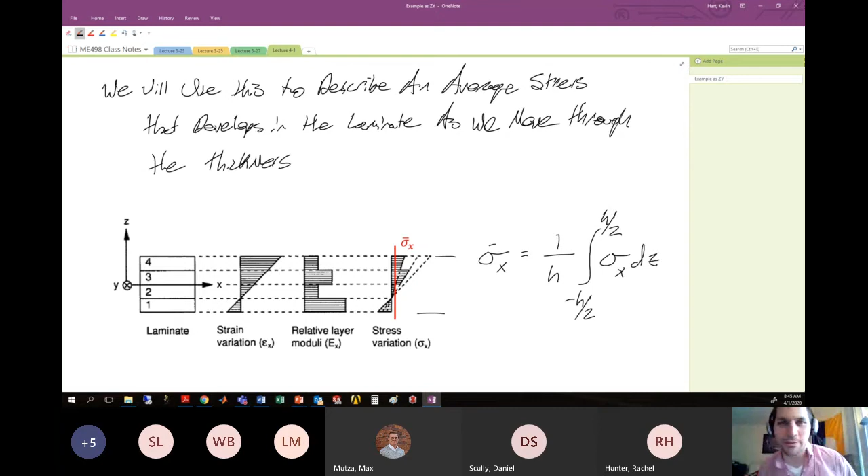Mathematically, we write that the mean stress in x is equal to the average over the domain of interest. For us, that is from the bottom to the top, from negative h over 2 to h over 2. If you do the math, this will be 1 over h times the integral from negative h over 2 to h over 2 of the stress distribution that exists, sigma x, integrated over the variable z. This is the mean value theorem leveraged for this particular laminate to give us an average value of the stress that exists in the x direction of the laminate, given the various stresses of the individual layers of the piece.

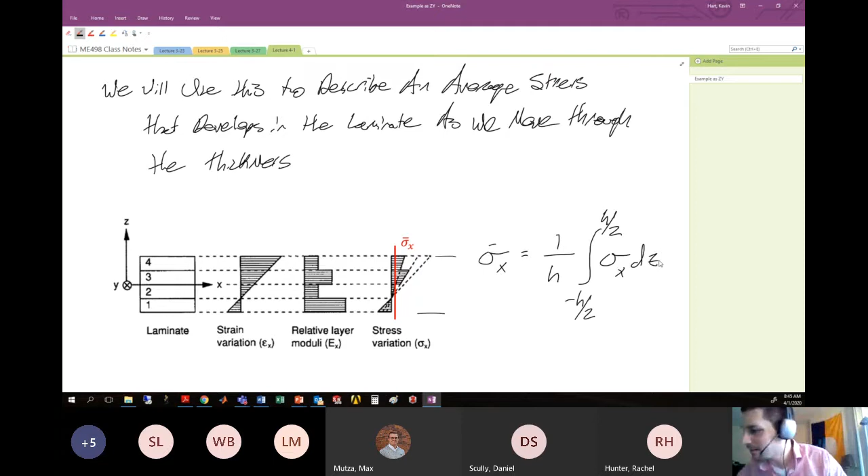So this is what we're going to work through. Let's look at this more closely and recall the definition of nx, which was our load applied per length, where this is the force in the x direction normalized by the length of the laminate in the y direction. You can go back to lecture number 1, slide 11, for a refresher on what this actually is.

For us, we define this as the integral from negative h over 2 to h over 2 of the stress in x integrated over z. The force that is applied on the laminate must be balanced with the stress that is in that laminate as well. This is an equilibrium relationship. The forces and the stresses must more or less be balanced.

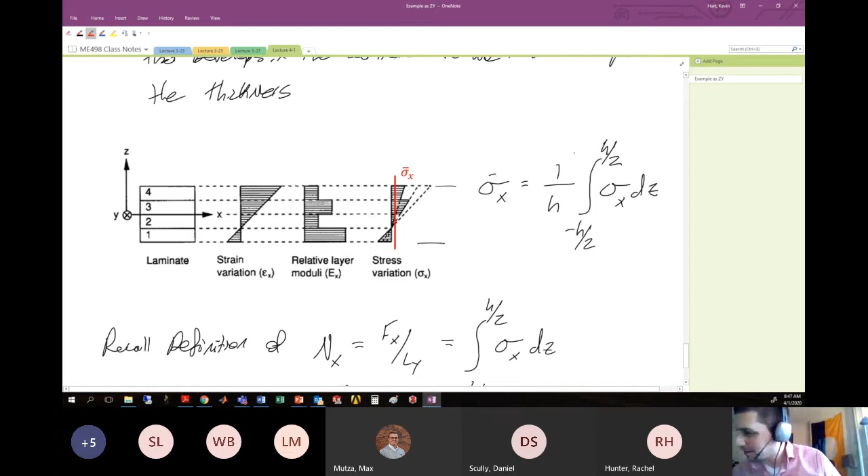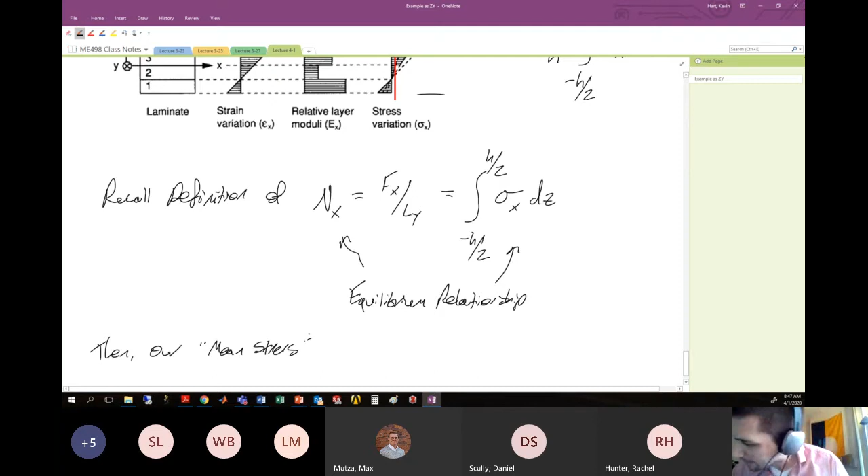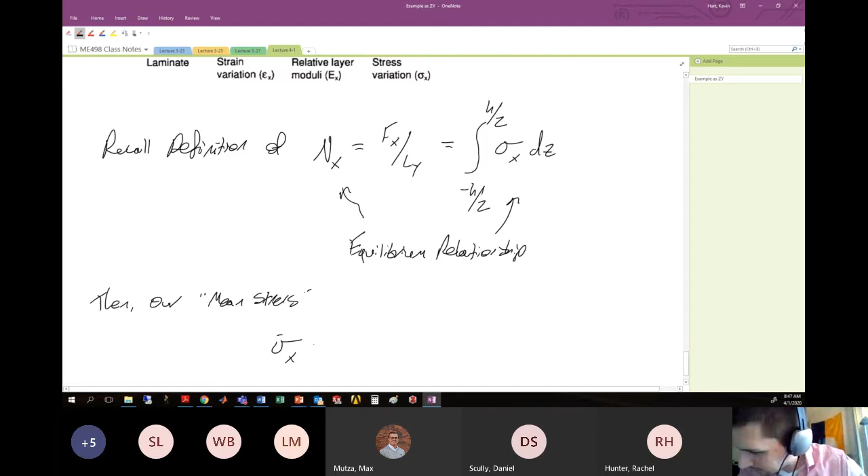We'll notice here that this particular integral looks very similar to the integral we have when looking at the mean value theorem. The only difference is this normalizing term, which is 1 over h. So we can conclude then that our mean stress is the loads we applied normalized by this value h. So we have sigma bar equals nx over h, very simply.

Similarly, we have that the mean stress in y would be ny over h, and the mean stress in s, or what we might see as tau xy, is going to be ns over h. Therefore, we can express the average stress on the laminate in terms of the load we applied, by taking the loads we apply and normalizing by the thickness of the piece.

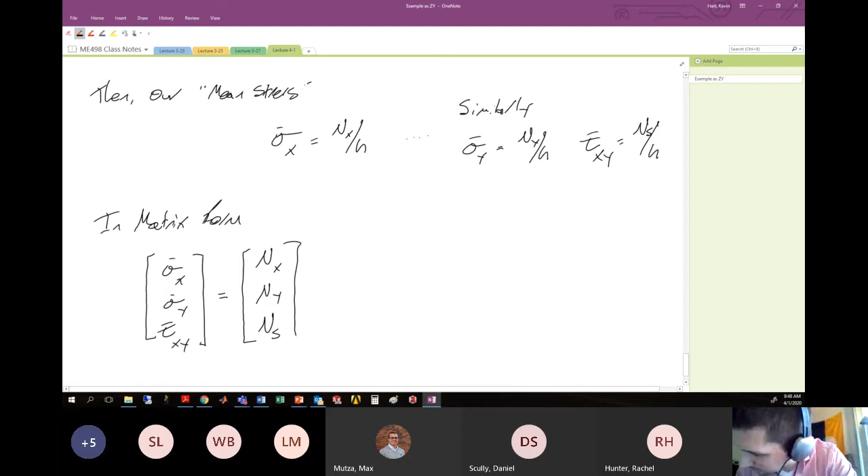So we might consider writing this in matrix form: the mean stress in x, the mean stress in y, and the mean stress of shear tau xy, is equal to the vector of loads we apply, nx, ny, ns, all times 1 over the thickness of the laminate, h. This makes sense physically when you think about it. This nx, ny, ns is the force normalized by the width of the laminate, more or less. And if we do one more normalization, the thickness of the laminate, this is more or less like stress equals force divided by area.

The inversion, not really the inversion but just reorganizing, is that the loads we apply are equal to the stress on the laminate, sigma x, sigma y, these mean stresses, all multiplied by h.

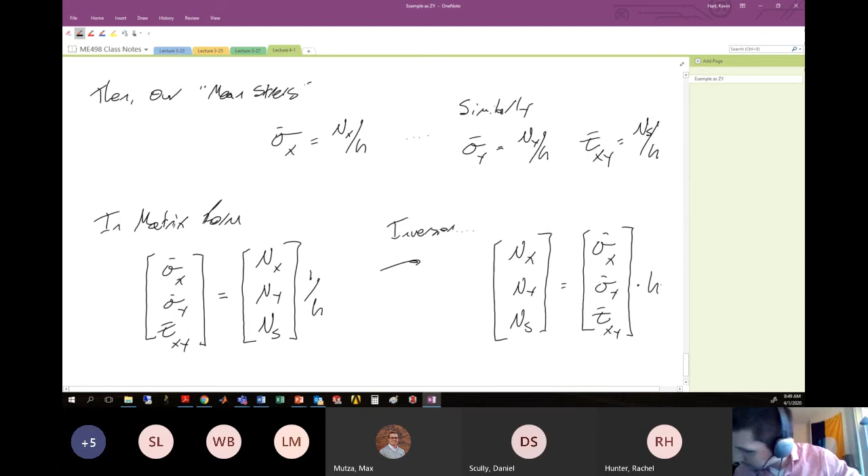So these two guys are probably box worthy. I don't know if they're sparkle worthy, but they're box worthy. Okay, so those guys get boxes. If you want to put some sparkles on them, that's up to you. Okay, this is where my madness takes over. But I don't think they're sparkle worthy. There are better equations.

Okay, so that'll be it for today. We'll stop here. Then we'll talk about how we relate these mean stresses that we just showed here to the strains that we're developing using the inverted stiffness matrix. Okay, so that'll be it for today. Thanks for coming. I'll stick around for a few minutes if people have questions. Thanks.

You're doing great, riveting stuff here. I know, it's exciting. I'm trying my best.